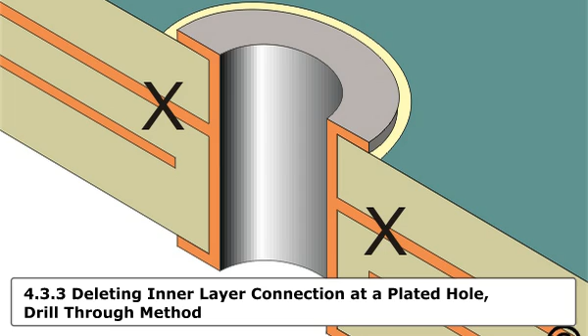This method is used on multi-layer circuit boards or assemblies to disconnect an internal connection at a plated hole. A precision drill system is used with a carbide drill, end mill or ball mill to drill out the hole. The hole may then be filled with epoxy and re-drilled to the diameter needed.

The minimum skill level needed to complete this procedure reliably is advanced. The conformance level reached when this procedure is completed properly is high. See the web page for a list of the tools and materials required to complete this procedure.

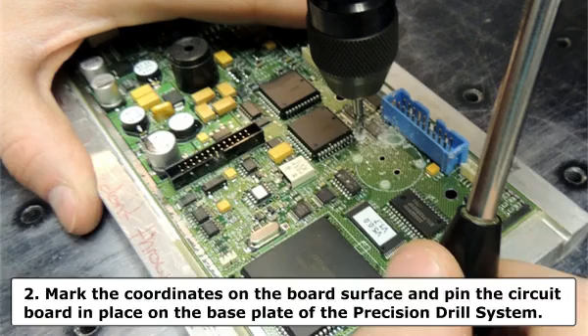The procedure follows. Step 1. Identify the hole that requires rework and clean the area. Step 2. Mark the coordinates on the board surface and pin the circuit board in place on the base plate of the precision drill system.

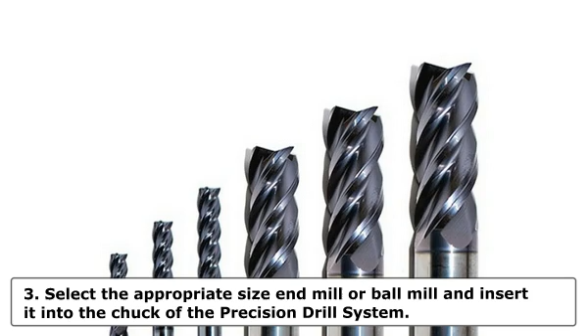Step 3. Select the appropriate size end mill drill or ball mill and insert it into the chuck of the precision drill system. The cutting tool should be approximately 0.50 mm greater than the plated through hole inside diameter. Set speed to high. Use caution. Abrasion operations can generate electrostatic charges. Note: end mills are normally single-end, 2 or 4 flute high-grade solid carbide.

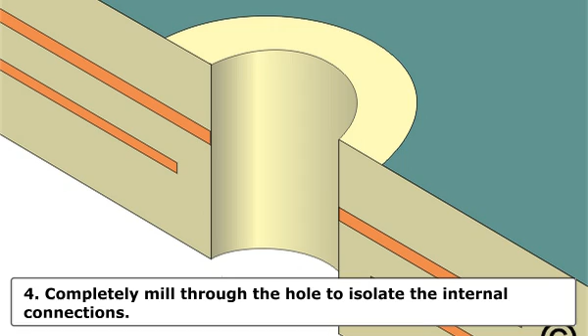Step 4. Completely mill through the hole to isolate the internal connections. A microscope should be used for accuracy. Step 5. Blow away material with air and clean the area. Step 6. Check continuity to be sure that the internal connection has been deleted. Also, check the continuity and inspect the neighboring circuits to make sure that none of them have been severed or damaged. If desired, complete the following steps.

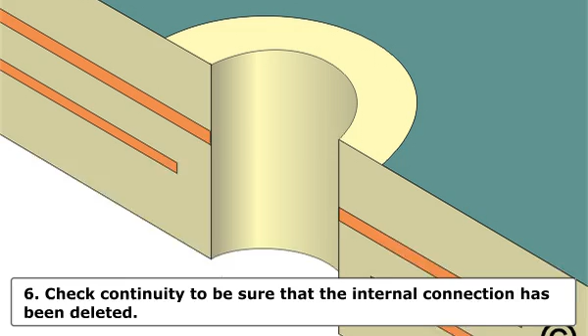Step 7. Mask the opposite side with high-temperature tape or flexible mask to prevent the epoxy from flowing out the opposite side. Step 8. Mix the epoxy. Step 9. Fill the hole with epoxy up to and flush with the surface. Remove excess epoxy. Note: a slight overfill of epoxy may be desired to allow for shrinkage when epoxy cures.

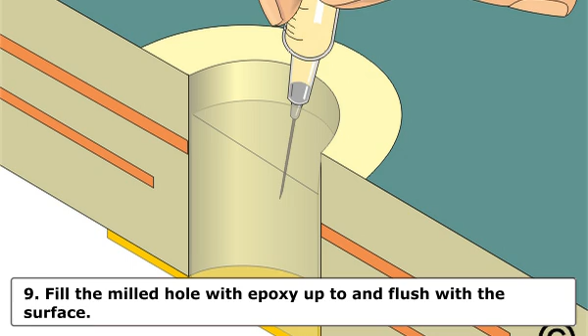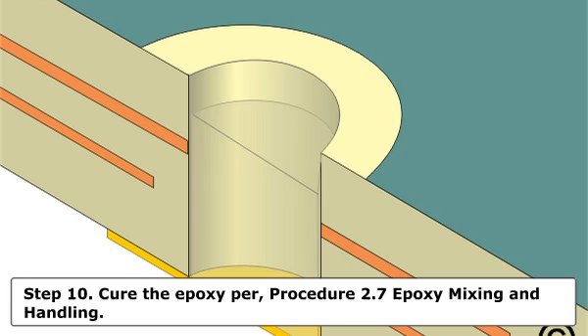Step 10. Cure the epoxy per Procedure 2.7 Epoxy mixing and handling. Use caution. Some components may be sensitive to high temperature. Step 11. Clean the area. Step 12. Select an end mill or drill as needed. Insert the cutting tool into the precision drill system.

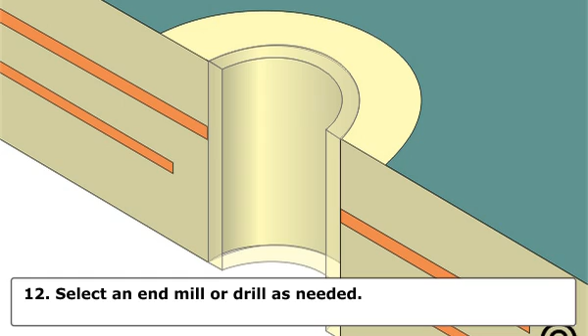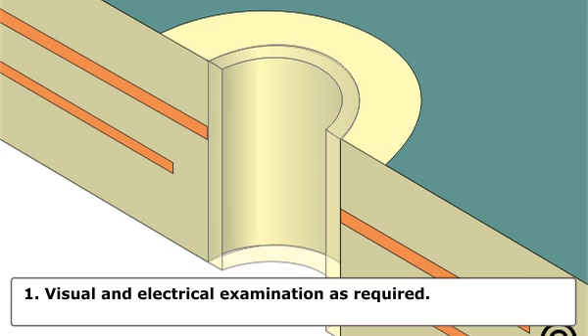Mill directly through the center of the cured epoxy. The surface pad remaining may be used as a target location for accuracy. A microscope should be used during milling for accuracy. Caution. Be careful not to re-expose the internal layers of the hole when drilling out the epoxy. Step 13. Clean the area. Inspect the new hole using a microscope. Evaluation. Step 1. Visual and electrical examination as required.